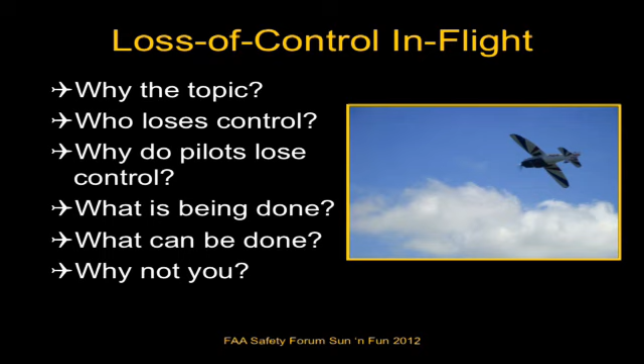This afternoon's topic is loss of control in flight. Just a brief outline of what BJ and I will be talking about this afternoon: first, we're going to try to convince you why this is an important topic. We'll give you some statistical evidence, then go into why this has become a problem in all aspects of aviation. We'll discuss why, from a cognitive and flying standpoint, pilots lose control, and most importantly, what can be done about this potential problem. We'll give examples of what has been done, what is being done, and what can be done. And the bottom line becomes, once we present this evidence, why not you?

Okay, so I would like to bring BJ up. We'll be teaching this together, and BJ's going to give a definition of really what is loss of control in flight.

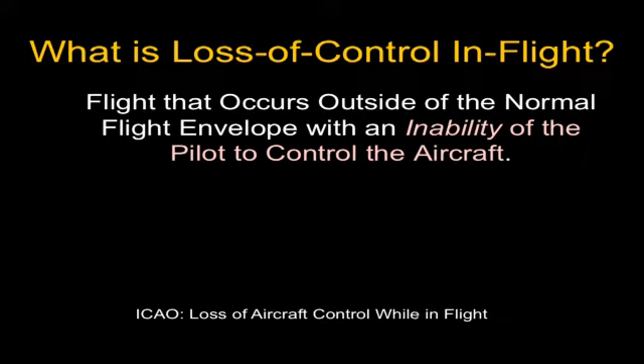Thanks, Janeen. An important topic in loss of control is really understanding what it is. Often there's confusion between what an airplane upset is and what loss of control is, and in fact one can lead to the other, but they don't necessarily have to follow each other. One definition we have is that it occurs when flight goes outside the normal flight envelope with an inability of the pilot to control the airplane. What is meant by a normal flight envelope? And when we say inability of the pilot to control the airplane, it doesn't necessarily mean the airplane isn't responding to their inputs—it's the inability of the pilot to properly stop the flight path divergence, to get the airplane to do what he wants it to do as the end result.

So let's talk about the envelope. How do we define it? Well, one definition by the Airplane Upset Recovery Training Aid, even though there's a variety of them, for commercial pilots can be as little as 45 degrees of bank and a pitch of 25 degrees nose up and 10 degrees nose down. This can vary based on experience, the type of airplane you're flying, and your background. But at the end of the day, what is the parameter set where you, as a pilot, need to realize whatever you were doing before doesn't matter, and now you have to regain control of the airplane?

Now that's just one aspect—that's pitch and bank. Within these parameters, there's another one: flying at airspeeds inappropriate for the flight conditions. That's kind of a broad statement, and a little bit later I'm going to get into some graphical analysis of what this implication is.

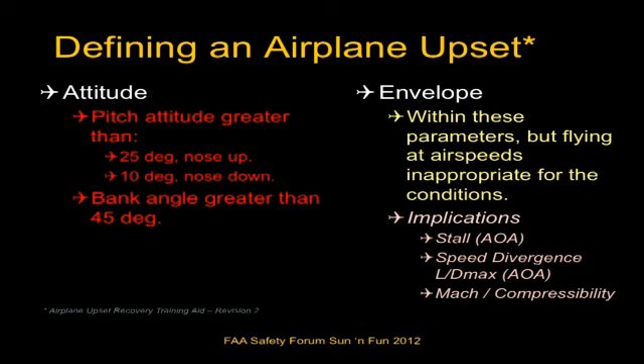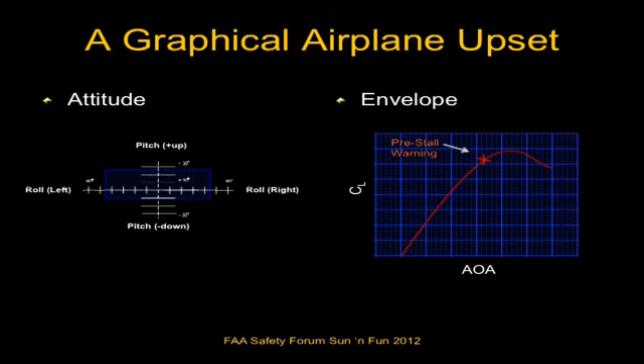To show you these two statements graphically, we take a look at the pitch and bank of an airplane. We can see it's a tiny window of about 45 degrees of bank, 25 nose up, 10 degrees down, within the envelope of that normal lift curve. I want you to remember that diagram because I'm going to come back to talk about it. The X I put on there is typically the indication that pilots have to realize they're starting to get themselves into trouble in relation to the flight envelope. That can be represented by a shaker, a light, a horn, or whatever warning system the pilot might have. We're going to come back and talk about this, and hopefully give a better meaning as to what the risk factors are and what awareness a pilot can have to know they're getting themselves into harm's way.

Some evidence—why are we even talking about this topic? First of all, I want to give a little history. In 2005, I had the opportunity to speak here at Sun and Fun, and the title of the presentation was 'Losing Control of a Perfectly Good Airplane.' And I'll tell you right now, this is the same stuff, different day, 7 years later.

As a matter of fact, the reason I even got interested in loss of control was a 1996 accident, when I lost three good friends in a DC-8 loss of control accident—they stalled the airplane and never recovered.

So when we were preparing for this year's presentation, I went back and looked at some more high-profile accidents that have occurred where the probable cause was a loss of control in flight.

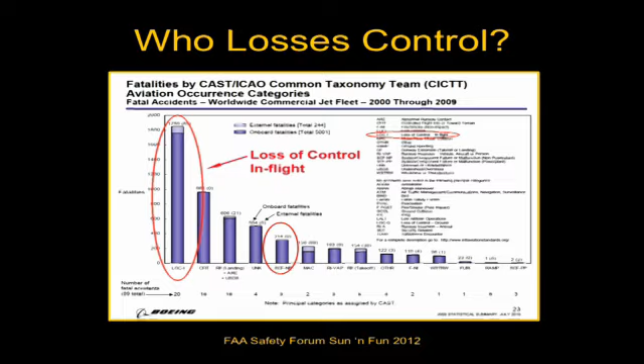So we've got high-profile accidents, and that's all well and good, and that may be what you read about in Flying Magazine, AOPA, and other publications. However, if we take a hard look at the statistics, at the real numbers, there are 3 points we need to make here, not only who loses control - are they commercial pilots, corporate pilots, general aviation pilots, just U.S. pilots? One point is we're not saying these are bad pilots.

This can happen to any pilot at any certification level, in any part of the world, in any type of airplane. So our title this year, Who Needs Upset Prevention and Recovery Training, UPRT, the answer can be everyone. We're going to come back to that a few more times as we talk.

On this slide, we show in the commercial aviation realm, Boeing publishes accidents on commercial airliners every year, and has been for many years, that loss of control in flight is by far, as you can see on this slide, the leading problem on commercial aviation fatalities.

If we include in that a failure of a system component or failure that's not the power plant - it can be any other system - that can also lead to a loss of control or maybe a contributing factor, or in the way we look at it, could be a precursor or the beginning of the chain of events that ended in loss of control.

We certainly have many more accidents, fatal accidents and fatalities, combining these two categories than all the rest of the categories combined. One thing that surprises me, being a designated pilot examiner and having the opportunity to examine and test pilots on a daily basis, including flight instructors, is to ask them just off the cuff, what area or types of accidents are the most prevalent in aviation?

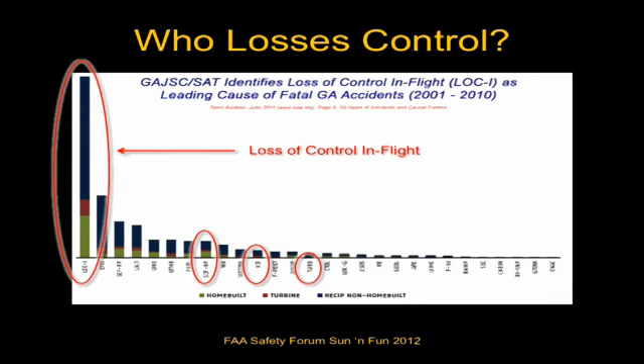This is new data. Once again, we can look at the systems component or failure, the SCF, non-power plant. Icing and turbulence are precursors to loss of control. So we look at all of those categories together, and we say, this is quite obviously a problem. BJ is going to talk a little bit later about how we're addressing that problem.

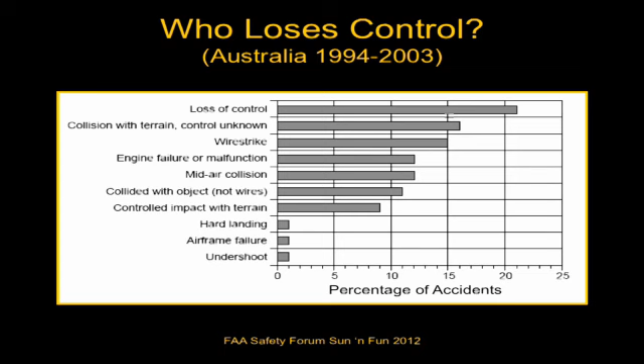If you're thinking, well, of course this could not possibly pertain to me, I also pulled off some specific examples of loss of control in flight. These are Australian - you can look up here, there's an Airbus A340, there's a Robinson helicopter, the R44, there's all kinds of different airplanes.

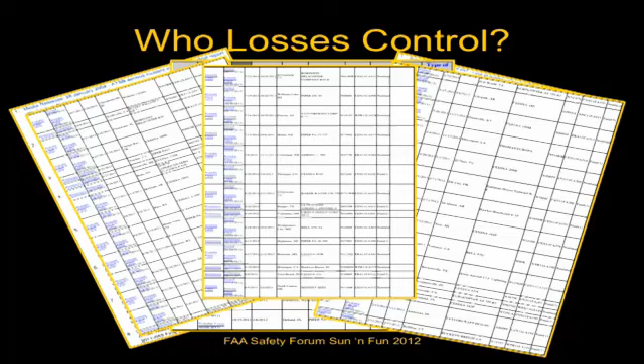Then I went back to the NTSB data, and what was quite interesting is I just looked at the last year. Wow, we've got a lot of different airplanes - a Beech A36, a Maule, a Rans S7, a Robinson helicopter. We have more just from the last year.

These are accidents, loss of control accidents, just in the last year in the U.S. - well, not necessarily in the U.S., but investigated by the NTSB. So you might find your type of airplane, helicopter, or flying machine on this list. And that's not to say these pilots were bad pilots that got themselves into this situation. However, somehow the chain of events evolved and got them into a loss of control in flight situation.

And just by comparison, what are the chances of the next accident being a loss of control in flight? Well, first of all, it's 3.4 times more likely to be loss of control in flight than a runway excursion, exiting the runway unintentionally.

You may think of this as large airplane problems.

But if you look at the data, you'll see how many times student pilots have a runway excursion. And oh, by the way, it's not usually on their first solo, it's generally on their second solo, when both the instructor and the student pilot have let their guard down, and all of a sudden they have a little bit of trouble on landing.

We won't go into the whole discussion about perhaps they should be making full-stop taxibacks versus touch and goes, but it's 3.4 times more likely to be a loss of control in flight. How about a runway incursion, where there's on the runway, almost 10 times more likely the problem's going to be loss of control. One of the reasons we are showing these comparisons is there have been big efforts in runway incursions. The FAA has been very diligently trying to address runway incursions, but on the other hand, it's 10 times more likely that you're going to have a loss of control in flight problem.

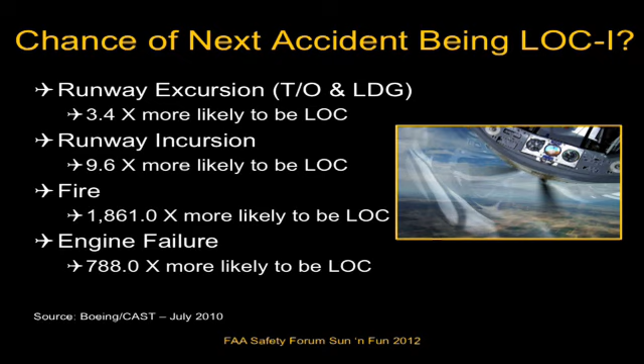1,861 times more likely than a fire, and this is one that I find very interesting: 788 times more likely you're going to have a loss of control in flight event than an engine failure. And throughout pilot certification, what do we do on every certification level? Oh, this is a simulated engine failure. Do we give them, this is a simulated flight control malfunction? So the example here is it is a problem, and perhaps it's not really being addressed.

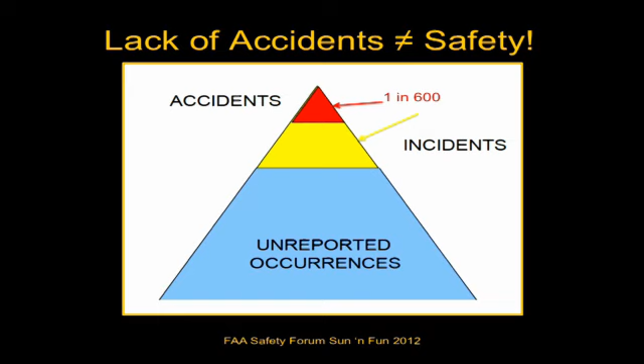Okay, one of my favorite slides. Those of you who have heard me talk before know I always jump up and down and say, okay, that's all well and good, that's accidents, that's fatal accidents. Accidents in and of themselves are not a good criteria, though, as to how safe the system is or how safe an individual pilot is. Because lack of accidents does not equal safety. For about every accident, we may have about 600 incidences, 600 loss of control incidences for every accident that is out there.

The more important color here is blue: the unreported occurrences. Every time it's, oh my goodness, I got myself in a really bad way and I'm really lucky I got myself out of that situation, nobody ever knows about it, and we don't address it, and we don't go back for further training to make sure that next time we find ourselves in that situation, we are sure of how we can get out. Or better yet, that we have the training and the academic knowledge and the flight training to not even get ourselves in that situation, or at least stop it before it becomes a real problem. Which brings up a very familiar slide.

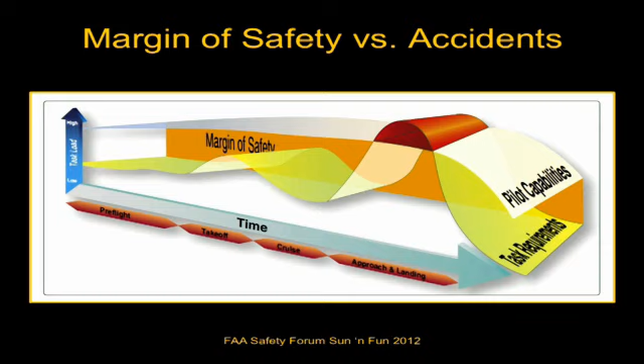I don't think we can wear this topic out. We're looking at the margin of safety. Once again, we're not saying that pilots are not good pilots, but what we are looking to do is increase that margin of safety against finding yourself in a loss of control in-flight situation. And as we see your margin of safety throughout a flight over time, from pre-flight all the way through approach and landing, it does change. And as we know, approach and landing is usually the highest workload and the highest probability of having more workload than the pilot has capabilities. But the point here mostly is the margin of safety throughout a flight can increase or decrease the chances that you will end up in a loss of control situation.

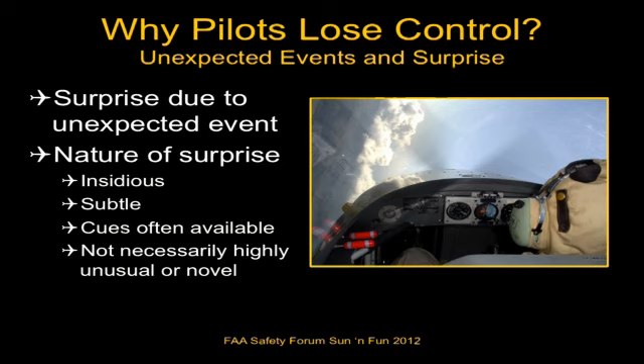A little bit of background: some academic research that's been conducted over the last 15 years on unexpected events and surprise fits very well into this topic, because if we look at how pilots think and how they're responding to situations, we find that an unexpected event or surprise can alter your thinking, and it does. But the first thing we need to note is surprise is not necessarily some catastrophic event where all of a sudden there's an event and you are out of control, you have lost control of your airplane. That's not how it happens.

It usually creeps up on you. It can be subtle, and there are often cues or clues available to the pilot that there is an impending problem. You can watch the hydraulic pressure decrease, and you can start projecting into the future using good situation awareness that, if I'm going to lose my hydraulic system, then that means I'm not going to have this component or this component.

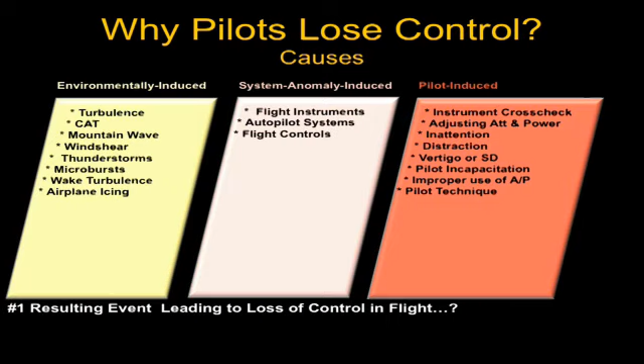However, the number one resulting event leading to loss of control in flight—anybody want to guess what it is? The number one event that leads to loss of control in flight. Base to final, what?

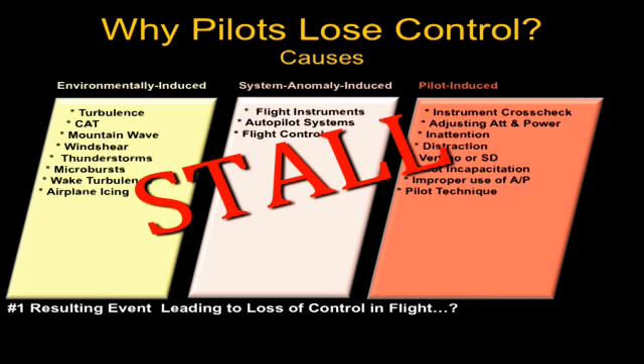Very good, stall, absolutely. So these precursors, we're not paying attention. We've inadvertently gotten ourselves into a stall situation or a stall spin. And you're saying, well, we practice stalls, we learn how to do stalls and recover from stalls. Don't get me started on that topic. BJ will talk about it.

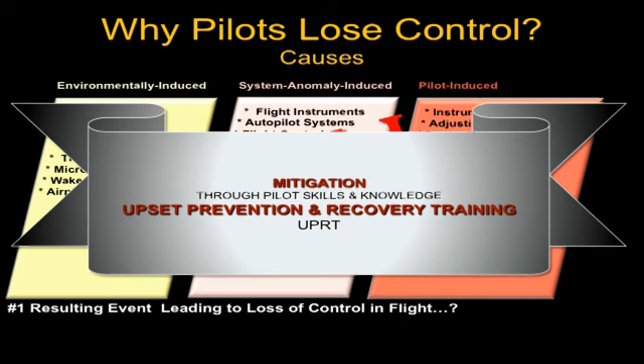But what we have found is we can mitigate this from the very beginning through both skills and knowledge, being aware of the situation, being aware of the threats, and specific targeted training. Because I only have to ask one question: if we're doing our training right, our pilot certification correctly, and we're evaluating pilots and their skills, knowledge, and abilities correctly, then why do we have so many loss of control in flight accidents? So I'd like to turn this over now because I've asked that question, and BJ is going to talk about what can be done.

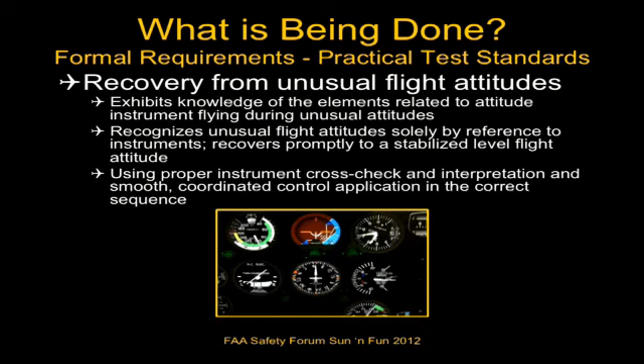As we all know, we are doing variations of loss of control training, for example, unusual attitude recovery training. Anybody who's been out there doing it knows it's relatively benign, but this is just an excerpt from the PTS as to what's expected and what performance a pilot needs to have. Now, if you take a look at the image in the bottom center, you'll probably agree that if you're doing training properly, legally, and safely in non-aerobatic airplanes, you have never seen a situation like you see there.

And that's just one example of an excursion of the flight envelope that we're going to talk about in a few minutes. But to just repeat what Janeen's saying, we can't get away and focus too much on recovery. Even though recovery matters, really what our hallmark of training needs to be is on awareness and prevention. That's something that needs to be continuously emphasized as we go through this discussion.

So what is being done? There's a variety of industry groups. We pulled an example from each area of aviation: general aviation, the FITS program, the NBAA training guides in the corporate world, and probably the one we pulled a couple references from here, the Upset Recovery Training Aid Revision 2 - documents recognizing the fact that loss of control needs to be addressed, needs improved training, and taking efforts to do so.

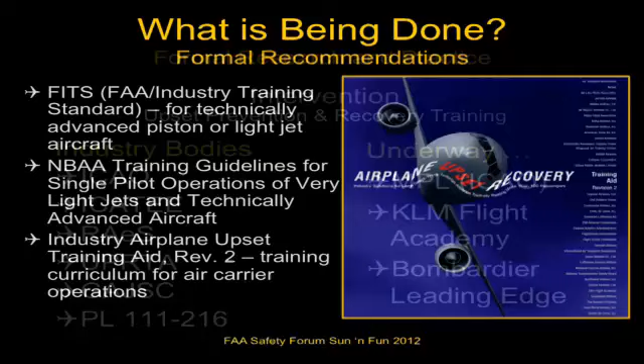So if we look into the industry as to who's active in doing this, they're going to try to intervene in this particular threat by applying upset prevention and recovery training. Some working groups going on right now, a hot topic with ICAO.

They're now looking at rewriting the MPL. They have a draft version in process to help them with their definition of what upset recovery training needs to be. ICATEE is an International Committee for Aviation Training in Extended Envelopes for the Royal Aeronautical Society, looking in this period at loss of control, upset recovery. UPRTA, Upset Prevention Recovery Training Association, is an international policing agency for upset recovery to control quality standardization of instructors and program delivery.

We saw some statistics from the GAJSC as well, and whether you're aware of it or not, Congress has mandated that the industry look into solutions for the stall, stick pusher, and upset recovery regime of training. So there's a lot of activity going on to try to make a difference in this threat that we're seeing. We need to realize, even though prevention is important and licensing training is excellent, there may be a hole we need to be aware of, to make sure we're tapping it and trying to take advantage of the resources we have today that are readily available to make a difference.

So there's some examples of people out there doing it right now, just a couple, there's many more. We talked about the MPL. It's always been a requirement since it was instituted, but the way it works in MPL is it's a one-liner right now in Annex 1 that says upset recovery training will be provided, but there are no details as to what it is. Well, that's about to change. It's going to be defined in great detail as to what's required.

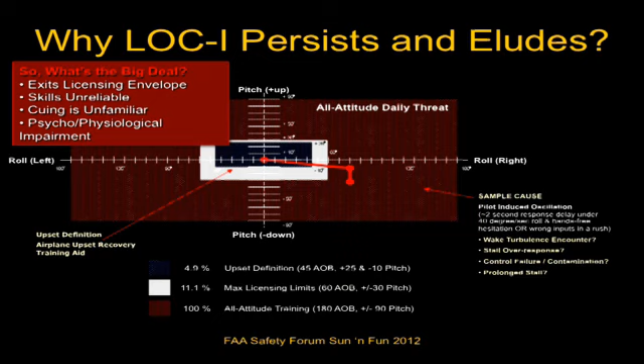So the big deal for pilots is that things start changing. It's exiting their experience, what they've experienced in the past. Their skills are now unreliable and may or may not be transferable. Their cueing is unfamiliar—now they're having a combination of aerodynamic cueing, motion cueing, audio cueing, buffeting, a variety of things cascading simultaneously that they've maybe never seen before, creating an impairment both psychologically and physiologically in the pilot. It's essentially a snowballing effect, making the situation worse.

So let's take a look at that graph I showed earlier. I want to show you a couple of parameters. I know we're a little behind and I don't want to rush. We often think that when we're trying to be safe in relation to the flight envelope, as long as we stay below the stall warning cue, we should be fine. And generally speaking, that is correct.

But if you think about your daily operations flying point A to point B, you spend most of your time actually flying in the normal flight region, not the slow flight region of your airplane. That L-over-D-max point is essentially a flight condition where, as we start getting below it, the handling characteristics of the airplane start to alter slightly, and we're getting into slow flight. As we proceed toward the stall, we have a required certification to give us a warning so the pilot is aware and can take preventative action to avoid the threatening situation.

The problem is that time and again, real life statistics show pilots don't stop there. Either they don't respond properly or they ignore the cueing because of all the other distractions going on when it occurs. The challenge now is when they exceed and go beyond critical angle of attack, the physics of flight change.

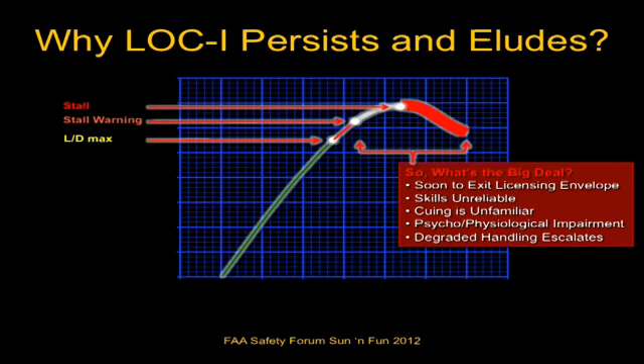If you think about your time in licensing, I'm not talking about aerobatic pilots or pilots who spend a lot of time in this region, but if you're the general pilot with excellent licensing training, going to the full stall break might only be done during your initial pilot rating. After that, as a commercial pilot, maybe as an instructor you see it, but as a commercial or ATP pilot, especially at the big airlines, your goal is to never go beyond the stall warning or the preventative indication. The problem is, that's wonderful, except it does happen that people go beyond that.

Just like in our previous slides, what's the big deal? Well, now they're starting to exit the licensing region, what they're exposed to. Skills are again unreliable. The combination of all the cues distracts them, and then impairment occurs. Probably the biggest thing, especially in the stall, and we're going to watch a video on this in just a second, is that the handling characteristics of the airplane are not at all the same in this region. In the red region to the right of CL max, or critical angle of attack, it's very different than normal flight. Again, adding to the confusion, to the impairment, and the cascading effect of making it more difficult for the pilot to recover.

So, we're unique in the fact that with our business, we've trained thousands and thousands and thousands of pilots. So what did thousands of pilots reveal to us in upset prevention and recovery training?

Unknown to most pilots in the world, it really doesn't matter, from what we've seen, how many flight hours they have, how many ratings they have, what their instructor experience is, their airplane type, or their depth of classical aerodynamic knowledge or academic knowledge. We found, because we expected there to be a difference, that when it actually gets into a developed upset, beyond as it exits that licensing region, the envelope becomes a level playing field. For people who haven't had specialized training, just about everybody is the same when it comes down to their capability. And that is near nil capability in actually affecting recovery from a certain threshold.

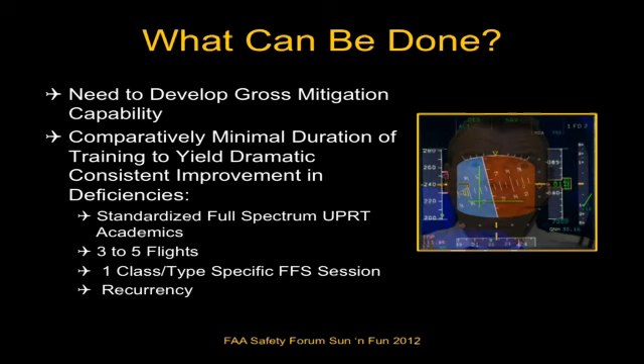So what does that footprint look like? Well, there's an example of an upset prevention and recovery training program. Classically speaking, what we generally deal with right now is academic training, some awareness training, and then prevention, taking early effective actions either at the edge of the blue region or as we start getting into the white region of licensing training. What upset prevention and recovery training does is take it even further. It builds on what's happening now. It reinforces prevention and develops a recovery capability in an all-attitude environment.

The most important part of this added mitigation is to be sure that it's not negative training. It's very important that the skills imparted in training are transferable and useful, even if that pilot's going to go into a career flying business jets or airline category airplanes. So you have to be very, very careful of that.

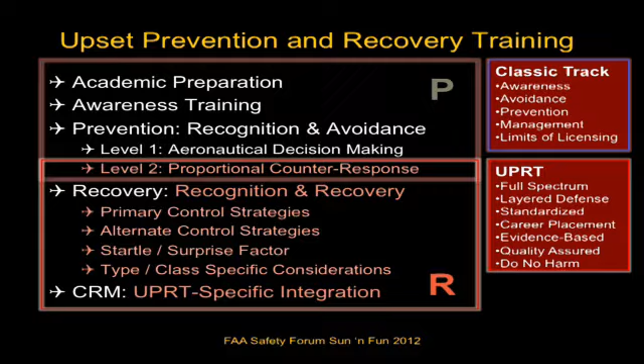I'm rushing past this slide just because I know we're running out of time. So if you want to think about it, the top box is generally prevention, and the bottom box is generally recovery, where CRM and SRM can permeate throughout the entire footprint.

Do we have time for this video, Judy?

Okay, so here's an example of awareness training. If we just learned from Janeen that 50% of loss of control accidents are due to the stall, well, why would a pilot stay in that region?

Let's take a look at an exercise called the falling leaf exercise. This is where the instructor talks about the cues and indications that show the pilot they're putting themselves into harm's way. You'll hear the instructor say we're not here to learn skills, we're here to learn awareness. So the intent of the falling leaf is not to learn how to fly an airplane beyond critical angle of attack, it's to recognize the cues and understand that they need to not be there in the first place, and exit the region. So let's watch the video, and then Janeen will be up.

Okay, you have the controls. I have the controls. Let's go power idle. Powered idle. I'm going to talk you through this, just listen to my inputs, all right? We're going to hold the elevator back. I'm going to help you do that because you're not going to want to do it. But again, we're not here to develop skills, we're here to witness the instability of stalled flight, okay? All right, so let's go ahead and hold that elevator back. There you go, all right, that's it. Don't let it—when the wing drops, just stop with a little bit of rudder. As soon as it stops, get those rudders neutral. You can see it really wants to go on you, doesn't it? Yes, it does. Okay, would you agree that this is pretty unstable?

It's completely unstable. All right, now what I want you to do is one step, and it's going to be the push step, all right? Okay. And now push, that's it, one step. All right. And I have the controls. You have the controls. So you would have to agree that if we get into a stall, we are fighting instability, all right? We really are. And what's creating it is we as the pilot have eliminated our margin of safety from the stall by pulling on the elevator. Okay.

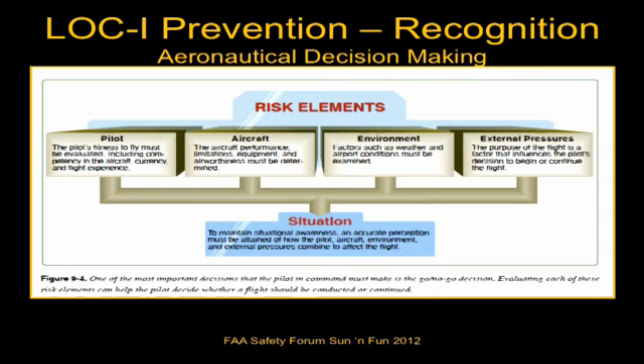If you remember the causes of loss of control, the environmental factors, the system factors, and correlate these to the risk elements, you can look at the pilot—not only your ability to fly, but your training—aircraft system anomalies as far as pre-flighting and knowing your aircraft, being able to predict and perceive the weather and the environment properly, and also take a look at external pressures.

If any of you were here this morning for Evan Burns' talk, many times he was talking about maneuvering flight and loss of control in flight. However, the external pressures and the thoughts that the pilots had and the purposes for getting themselves into the situation to begin with were not valid. So being able to deal with those external pressures and evaluate them.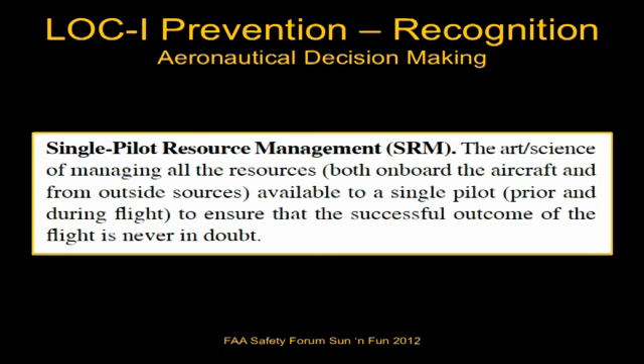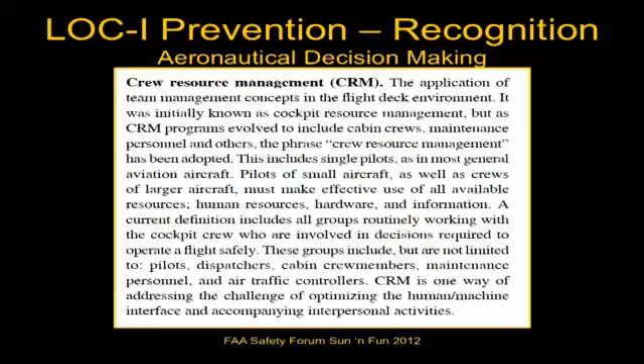And as we've talked about in the past over and over again, we talk about single pilot resource management, being aware of your environment and using all of the available resources. Crew resource management, of course, there's specific crew resource management training necessary for upset prevention and recovery training. And research has demonstrated over and over again that these need to be practiced in the simulator and/or in an aircraft and specific to the upset situation.

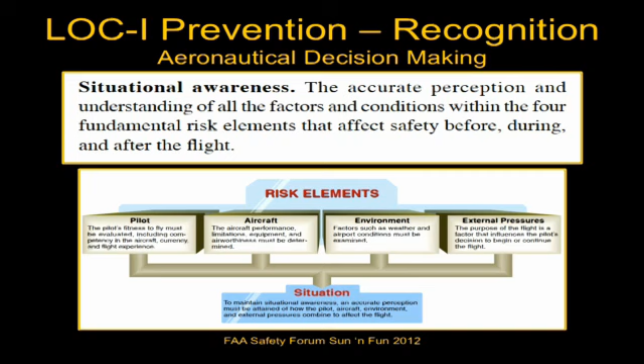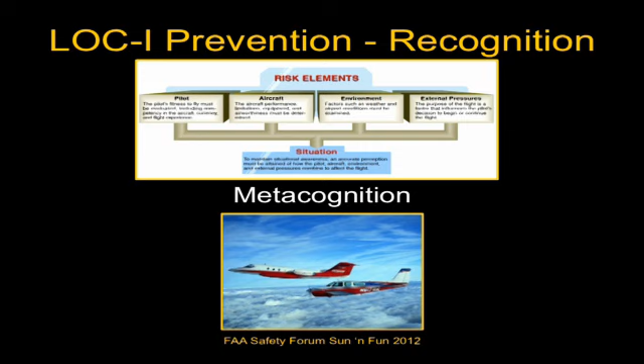But one of the most important factors that we can look at for prevention of loss of control in flight and recognizing it is, once again, aeronautical decision-making and looking at the risk factors. And I'm going to throw in my favorite word, metacognition. Metacognition is thinking about what you're thinking about. Are you paying attention to what needs to be paid attention to?

And we use the adage all the time to aviate first, to pay attention to the airplane. Aircraft state—the state of the aircraft—is a major factor in loss of control. In other words, the lack of awareness of the state of the aircraft is unknown. The pilot just is not aware of his aircraft state, therefore he's not going to reduce the angle of attack at the appropriate time or early enough.

So metacognition, you need to pay attention to what you're paying attention to. And the second part of that is evaluating your own performance. Are you doing what's necessary to control the aircraft and keep it where it needs to be?

The last item here, we'll bring BJ back up, and he's going to talk about if you don't pay attention, if you get yourself outside of the normal envelope, then you need to be able to recover. So I just got finished telling you that prevention is the most important point until you have to recover. Then, of course, that becomes very important at that point.

So what I wanted to do now is kind of a summary. I just pulled it from our previous chart on proportional counter response. That simply means that whatever event is being presented to you, you need to respond in proportion to it. In other words, you don't want to under-respond, you don't want to over-respond, you have to be able to mitigate and resolve it back into the heart of the blue box we talked about earlier.

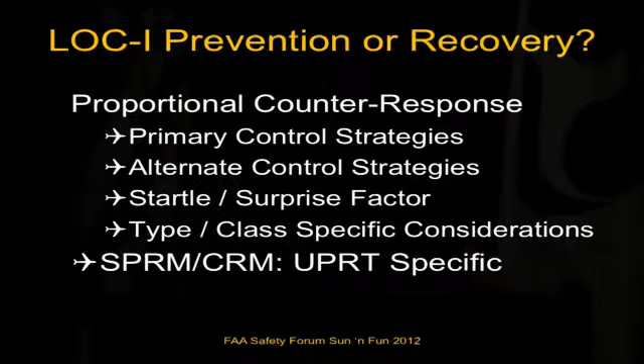So let's take a look at an example of a video of a situation of a recovery. This is going to be an overbank nose-low recovery. The particular pilot, you're going to hear him talking through the recovery, his ability to break through that crisis, that mental lockup, that incapacitation, to affect recovery by solving parameters in a certain process or certain sequence. And then what we're going to do is take a look at transfer of control into the airline environment. So running through this quickly, I want to let the videos play because I think there's value.

Nose low, disconnect, push, power, rudder, roll, one.

Okay, so that's an example of training. Now, it wouldn't mean a whole lot, especially if we're training airline pilots. The biggest objection is, how can I learn anything in a tiny aerobatic airplane that I can use in a big airplane, whether that be a light multi-engine airplane, a business jet, or a transport category airplane? That statement has validity because there's a tremendous amount of negative things you can train in a light aerobatic airplane for the business jet transport category pilot. However, if that training platform is used to develop strategy and concept, you can transfer a tremendous amount of information to help the pilot be more effective.

So here's a pilot in a very similar situation, overbank nose low in a 737. I'm going to let it run. Now, is it a perfect recovery? No, it isn't. Is it a safe recovery? Possibly. It certainly beats hitting the ground, that's for sure. Up here, you take a look. Here's the speed tape along the left side, here's the altitude. You're going to see the speed tape enclose on itself. G loading is down over here, throttle's control column. This is an external view, and then this is in the cockpit. I'm just going to let it run, and you'll see a very similar transfer of concept and strategy into this particular situation.